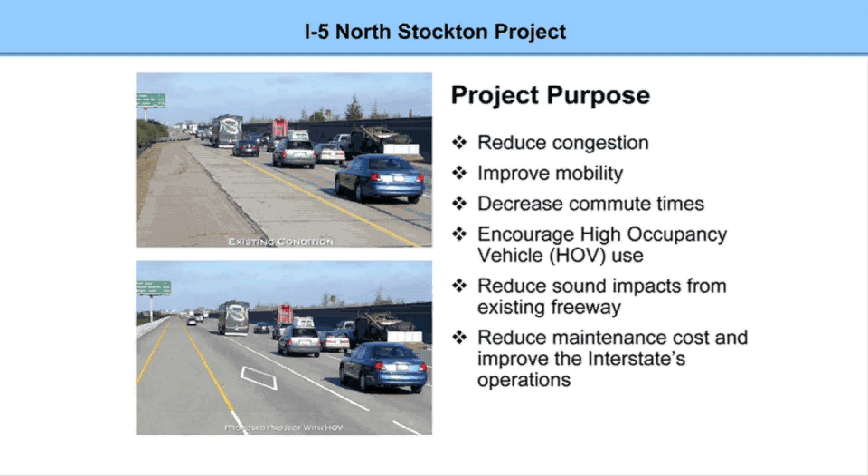This last bullet is important as it qualified our project for additional state funding through the State Highway Operations and Protection Program. Phase 1 of the I-5 North Stockton project has 5 distinct elements that define its scope. They are to widen the freeway to 8 through lanes from Country Club Boulevard to Hammer Lane, replace all existing pavement with long life pavement, add auxiliary lanes and sound walls between the March Lane and Hammer Lane interchanges, and

introduce the first high occupancy vehicle lanes in San Joaquin County from Dr. Martin Luther King Jr. Boulevard, previously referred to as Charter Way, to Hammer Lane. The HOV lane will become the lane that will be constructed within the existing median.

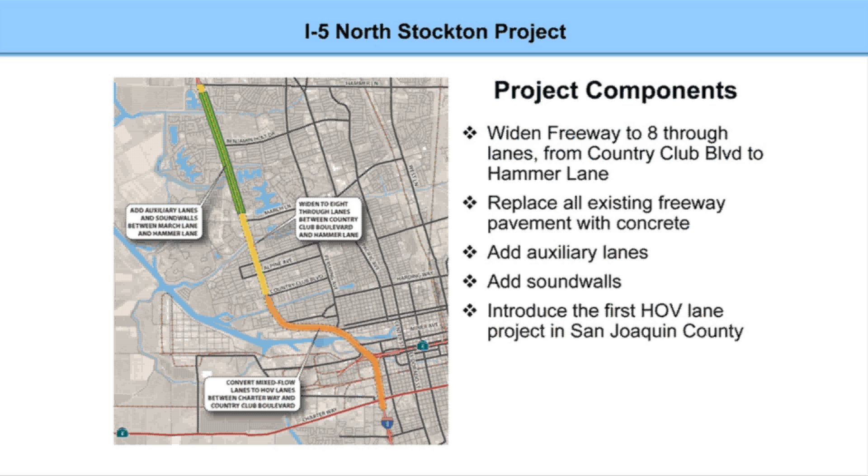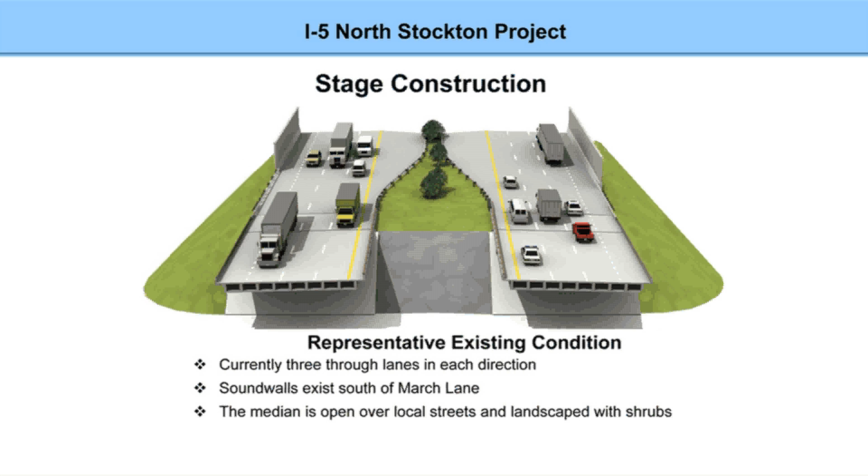Stage 1, which is currently in construction, will keep traffic in the existing lanes. However, there will be a temporary concrete barrier that separates the construction area from the travel lanes. Stage 1 will construct the median widening of the freeway and bridges. This stage will also construct retaining walls along the northbound outside shoulder between March Lane and Hammer Lane. Construction is estimated to take 1.5 to 2 years.

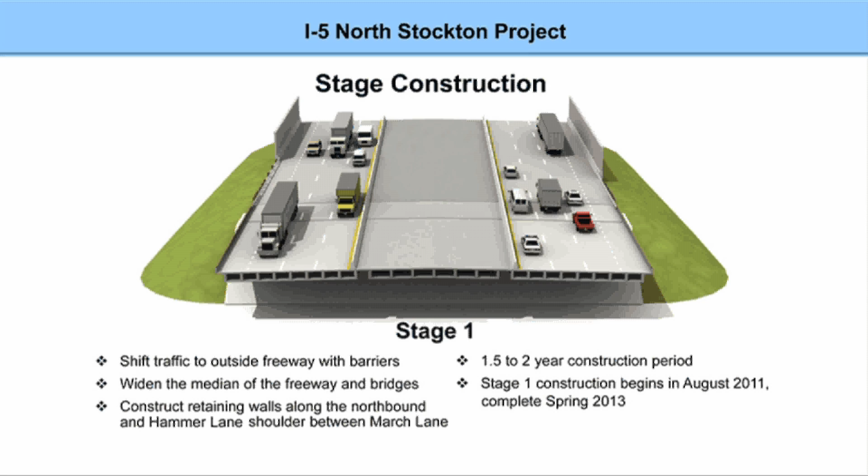I would be remiss if I didn't ask for your assistance in communicating to your friends and neighbors to slow for the cone zone and to remind them about the move-over law. As you may have heard, Caltrans has lost 3 of our maintenance workers in a period of 90 days. Given the amount of construction that we are going to perform, safety needs to be our #1 priority.

Stage 2, which is scheduled to begin in the spring of 2013, will shift the northbound traffic to the newly constructed median. Traffic will be diverted into the median south of the Country Club Boulevard undercrossing and will reconnect to the existing highway just south of the Hammer Lane undercrossing. Access to the on and off ramps will be provided.

A little fun fact, an undercrossing is when an interstate or state route crosses over the top of a local road, and a bridge is when an interstate or state route crosses over a water body. 3 travel lanes will remain open in each direction, 3 lanes in the southbound direction, and 3 lanes in the median for the northbound traffic.

The existing northbound lanes will be completely rebuilt using long-life concrete pavement, with an estimated 40 years of service life, and the northbound auxiliary lanes will be constructed between March Lane and Hammer Lane, including sound walls. Construction of Stage 2 is estimated to last 1 year.

Stage 3, which is scheduled to begin in the spring of 2014, does the exact same thing as Stage 2, except that it shifts the southbound traffic. The southbound traffic will be shifted to the newly constructed median. Traffic will be diverted into the median south of the Country Club Boulevard undercrossing and will reconnect to the existing highway just south of the Hammer Lane undercrossing. Access to the on and off ramps will also be provided.

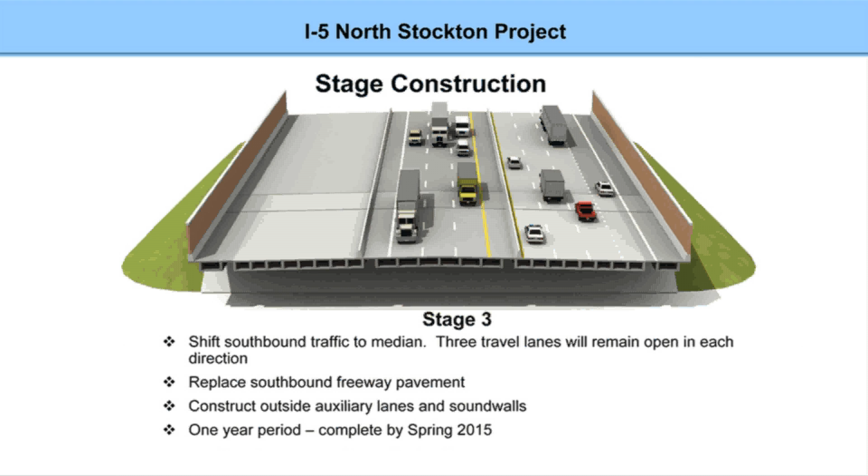3 travel lanes will remain open in each direction, 3 lanes in the newly constructed northbound direction for the traffic heading north, and then 3 lanes in the median for the southbound traffic. Construction of Stage 3 is also estimated to last 1 year. Stage 4, beginning in the spring of 2015, will shift the southbound traffic to the newly constructed southbound lanes, construct the median barrier, and perform the final striping for the HOV lanes.

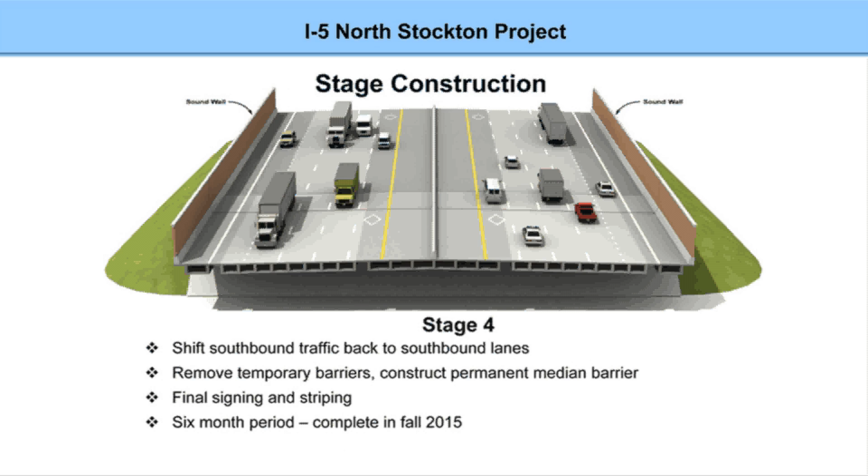Construction of Stage 4 is estimated to take 6 months, meaning that the project is planned to be completed by the fall of 2015. I'd now like to discuss the potential traffic delays that are likely to be experienced during the life of this construction project. This slide gives a very general overview of what can be expected.

With respect to local road delays, there will be lane restrictions at 6 local road locations and 3 temporary road closures for the widening of the undercrossings. The temporary closures are necessary for the required framing of the undercrossing median and will create a situation that prevents vehicles from safely passing through the work zone. This condition is anticipated to last up to 6 months.

Again, it's the department's, the cities', the counties', and the Council of Governments' primary concern to create a safe working environment for our construction staff and for the traveling public. The lane restrictions and road closures will be discussed in more detail later in this presentation.

Noise that residents can expect during construction: our normal working hours are from 7 a.m. to 7 p.m. However, there will be periodic late night work to shift lanes, place temporary barriers, pour new concrete, drive structure piles and waterways, etc. Increased traffic on the approved detour routes will occur in the first stage of construction and will last approximately 6 months. These approved detour routes will be described in a few slides from now.

The construction of this project will create freeway conditions that could and more than likely will cause delays, such as narrowed shoulders and through lanes, and then during night work the contractor will be reducing the number of through lanes from the hours of 8 p.m. to 6 a.m.

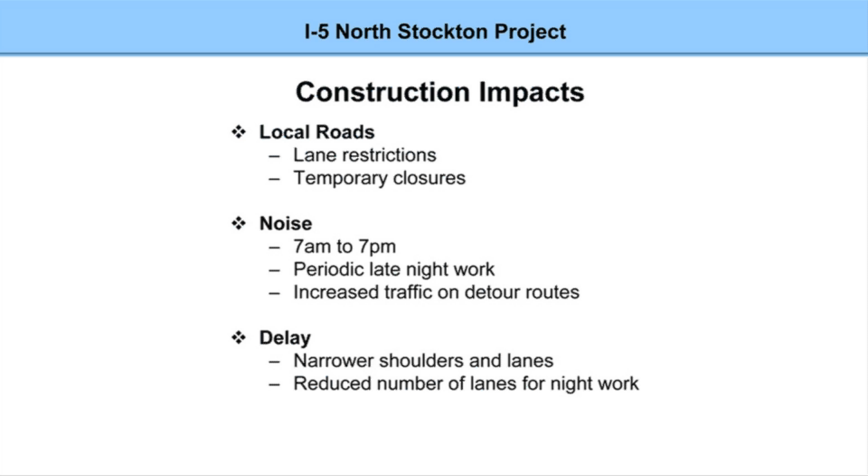Caltrans, in conjunction with the San Joaquin Council of Governments, will work very closely with the City of Stockton and the San Joaquin County's Public Works staff to inform motorists of upcoming closures and detour routes. Public information officer outreach efforts have already begun between the City, San Joaquin County, and the San Joaquin Council of Governments via focus meetings, mailers, a web page, and a published public outreach plan. The intent of our collaborative outreach is to build public awareness regarding the project's potential impacts to the traveling public.

At a minimum, the temporary road closures and lane restrictions will be disclosed to the public 7 days prior to the actual closure or restriction. However, if it is determined necessary, our public information officers and construction staff will work to accommodate requests for extended periods of notification.

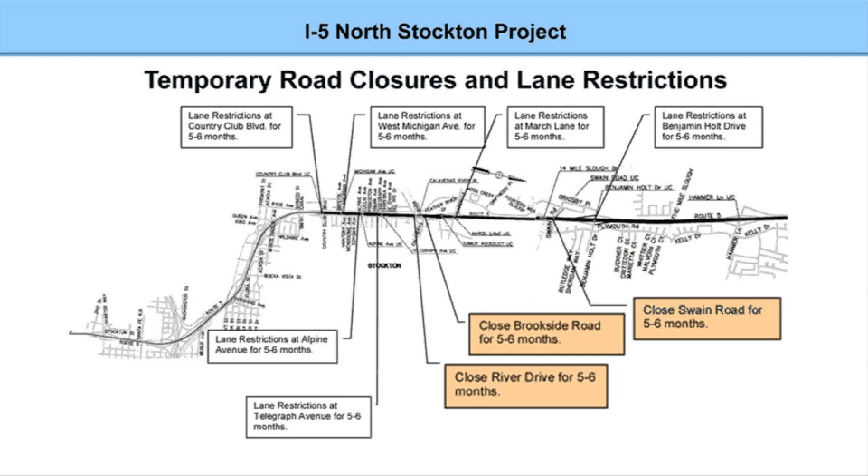This slide and the next slide describe the detours plan for the temporary closure of Brookside Road, River Drive, and Swain Road, where they intersect Interstate 5. As previously stated, these temporary closures and detours are needed for the construction of the additional lanes on the highway as part of Stage 1. The construction techniques necessary to build at these locations will create a situation that prevents vehicles from safely passing through the work zone on the local road. These conditions are anticipated to last for up to 6 months. These closures were discussed with and have been approved by the City of Stockton's and San Joaquin County's Public Works departments.

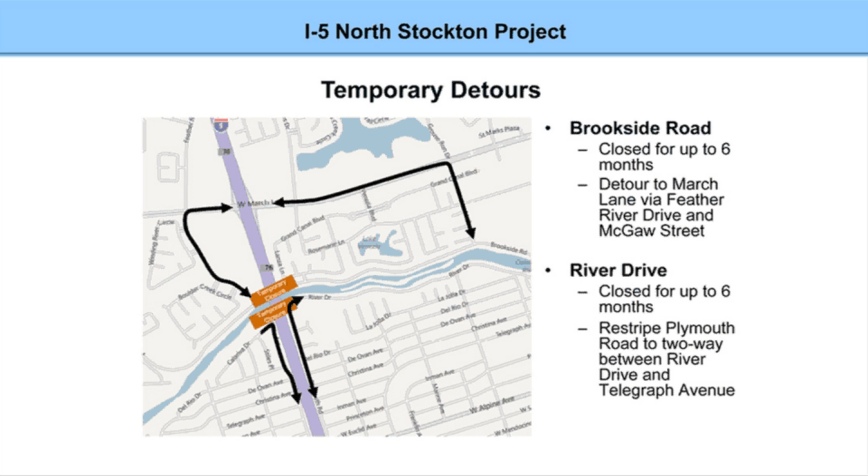As shown in this slide, Brookside Road's traffic will be detoured to March Lane via Feather River Drive and back to Brookside Road via McGaw Street. River Drive's traffic will be detoured via restriping Plymouth Road to two-way traffic between River Drive and Telegraph Avenue. Again, all of the temporary detours will be disclosed to the public at a minimum 7 days prior to the closure of the local road via changeable message signs placed on the local road, media outreach, and other proven outreach methods.

This slide details the detour plan for the Swain Road undercrossing construction. Swain Road's traffic will be detoured to Benjamin Holt Drive via Plymouth Road and back to Swain Road via Grigsby Place.

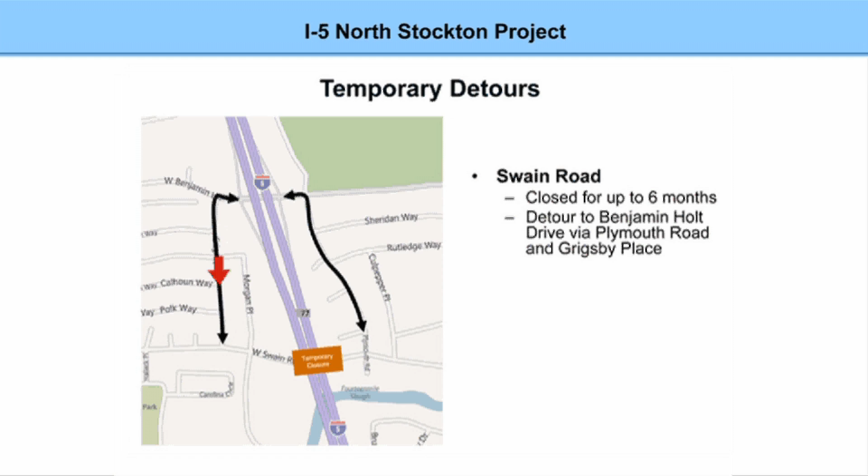In order to construct this 8-lane facility while avoiding impacts to private property, construction of this project will require the removal of trees and associated shrubbery. The removal of this vegetation is necessary to construct the required project elements needed to ensure a safe and sound travelway for the public within existing state-owned right-of-way.

The department is currently pursuing an opportunity to alleviate the loss of this vegetation through the submittal of an application for state dollars through a funding source titled the State Transportation Improvement Program Transportation Enhancement Program. This application has been prepared and submitted to Caltrans headquarters for consideration. Our district is requesting approximately $1.3 million to design and construct the landscape project that would include planting vines adjacent to the backs of the sound walls located throughout the project's footprint, and planting evergreen trees and large shrubs to enhance views. Permanent irrigation would be provided for all of the new planting.

It's the department's policy that revegetation or planting projects come after the freeway construction. If our proposal is approved, Caltrans will work very closely with the city, the county, San Joaquin Council of Governments, and any other interested stakeholder group to ensure that a collaborative effort is reflected in the final design and construction of this landscape project.

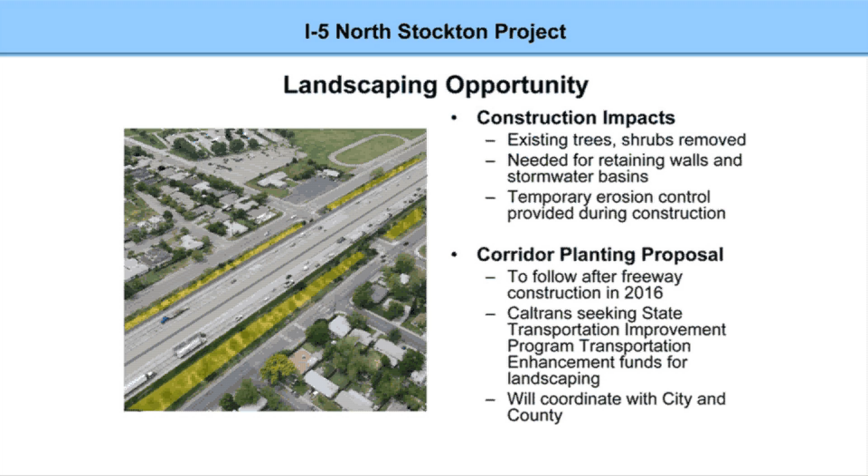Thank you very much for providing us this opportunity to present this information to you today. We're all looking forward to completing this much-needed project.